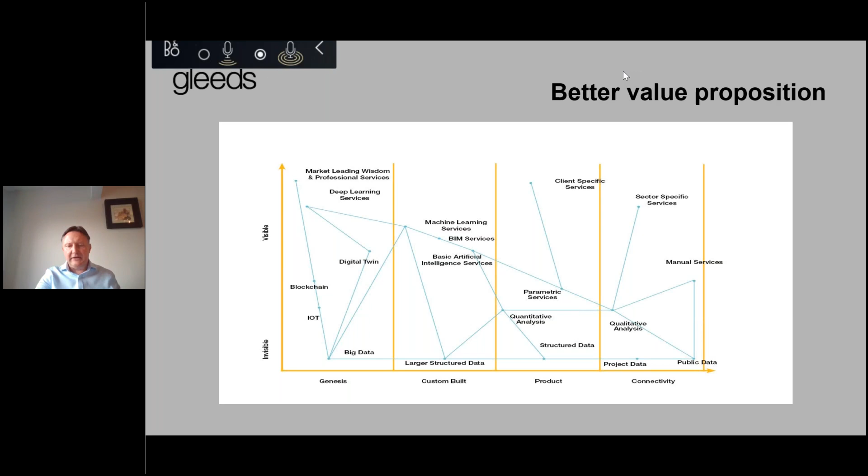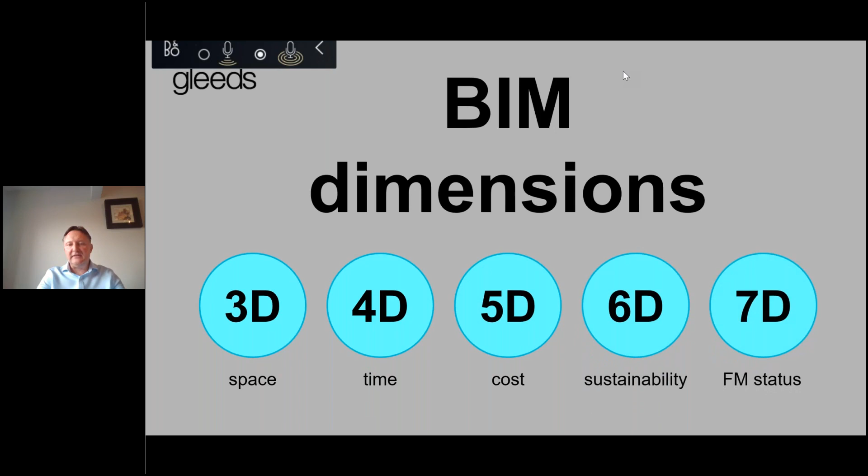But before I do that, I'd like to take you through the simple dimensions that we are using to augment what we do and make us better and more efficient. So the BIM dimensions that we're embedding into the core services are 3D, 4D, 5D, 6D, and 7D. I'll very quickly now take you through what I believe the benefits of each of those are.

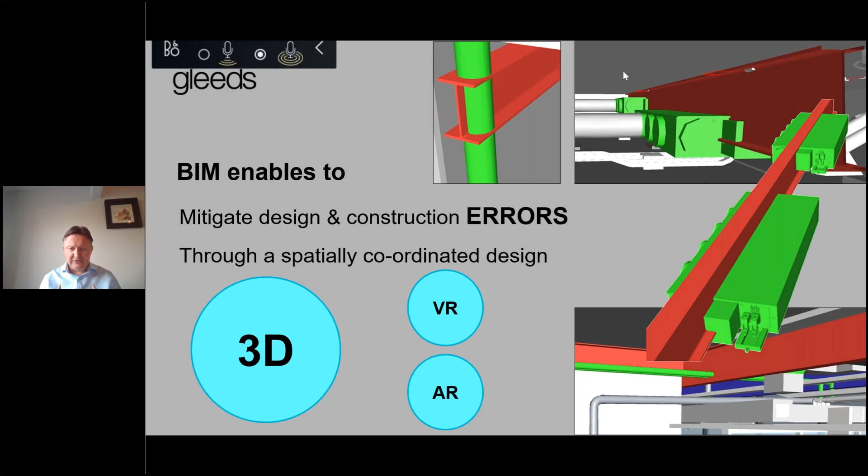So 3D, we all know, helps visualize a project and helps us mitigate design and construction errors through a spatially coordinated design, which I think some of the colleagues are going to talk about. But at Gleeds, what we're doing is increasingly using VR and AR to visualize our products and our services, and that's really helping communications.

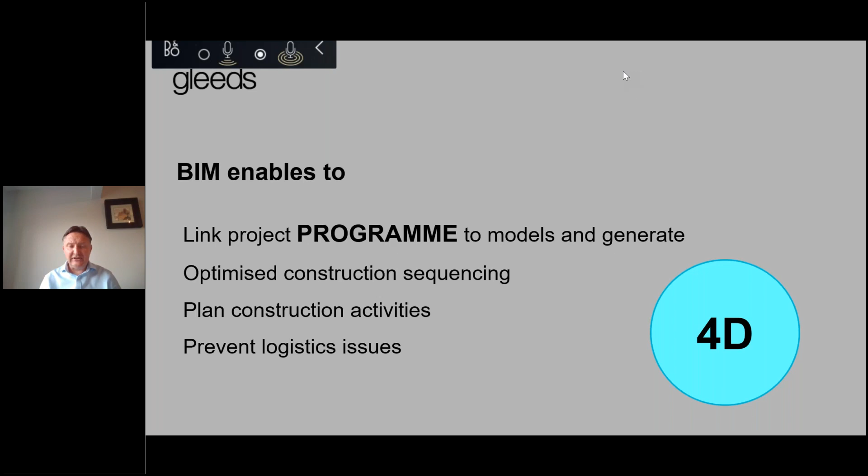In terms of 4D, again, we're linking models to our programs, and that's helping us optimize construction sequencing. It's helping us work with contractors and clients to plan construction activities, and it's helping us prevent logistical issues, which in the current climate is an extremely important tool.

In terms of 5D, we've been using 5D cost plans for a while now, and it's helping us enhance the accuracy of our cost plans. We can automate quantity takeoffs directly from the models. It's allowing us to give clients real-time cost visualization, helping us notify and visualize the changes of cost if there's a design change, and it's helping us with cost reporting and budgeting.

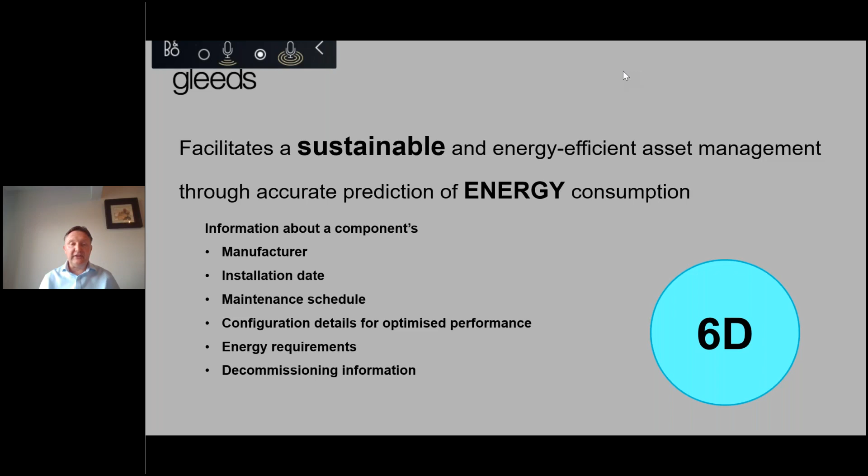In terms of 6D, this is without doubt helping us facilitate sustainable and energy efficient asset management, and it's helping us to more accurately plan energy consumption. I think that's going to improve the more we start to link it with digital twin, et cetera. But it's also enabling us to embed information about manufacturers, installation dates, maintenance schedules. It's helping us to configure how to optimize performance and energy requirements, and depending on what sector we move to, how we decommission that information.

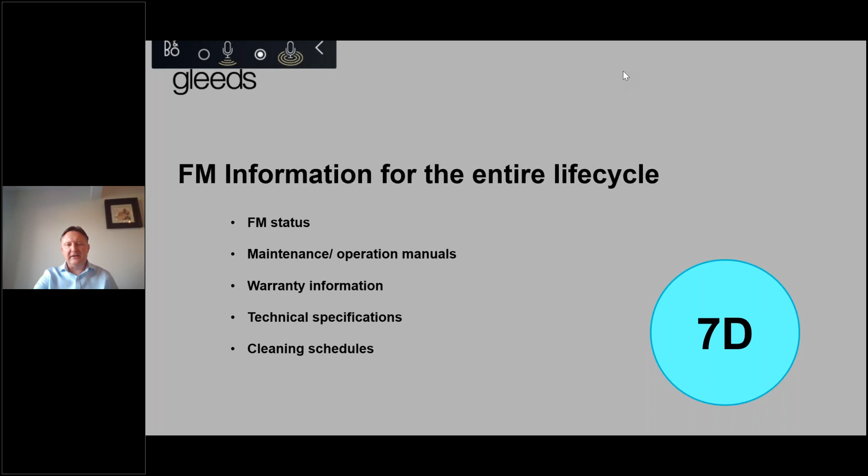In terms of 7D, again, we're using this more and more with our life cycle services and providing FM status, manual maintenance and operation manuals, warranty information, technical specifications, and cleaning schedules. We're increasingly looking at ways that we can link 6 and 7D to the new technologies coming into the industry. So BIM is absolutely essential in our digital transformation. It's a process and technology which helps us digitize and organize our data, which is enabling us to convergently augment project management, asset management, cost management, and building surveying. It will be essential for us with our divergent augmentations of new products and services, which will be linked to digital twins, modern methods of construction, artificial intelligence, the Internet of Things, and blockchain.

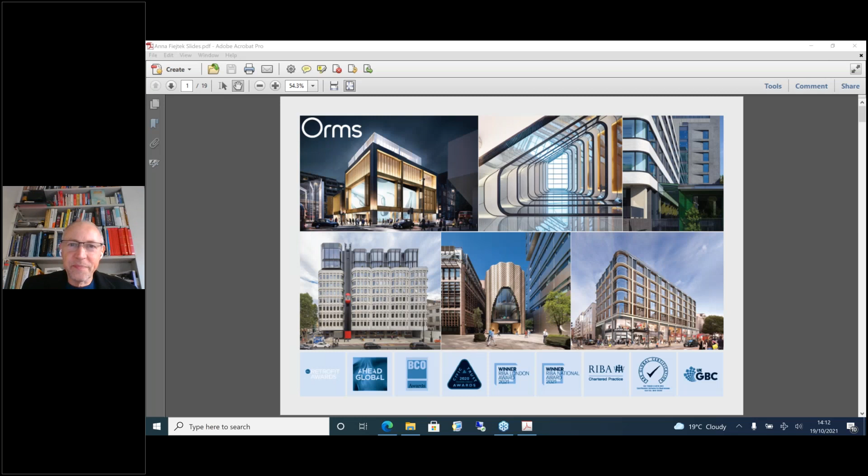Can you see my screen? Okay. Yes, I can. If you could maximize it, I think you've just done that. So that's perfect. Yeah, brilliant.

Thank you. Okay, so I'm Anna. I'm a BIM manager at Orms. I'm also a qualified architect and have been with the office for over 10 years. We are an award-winning architectural practice of 70 people with expertise in new build and refurbishments. We work on offices, hotels, residential, leisure, master planning, and school projects. We started implementing BIM in 2011, and currently all our projects are developed in 3D from the very beginning and embrace BIM workflows. We were awarded ISO 19650 BIM certification by BRE earlier this year, and we are one of the very few architectural offices to hold it, and we are proud to be recognized as BIM experts.

Similar to previous panelists, to us BIM is a clear winner. We don't do any projects in 2D anymore. This is because we see many benefits to BIM and think it's a better and smarter way of running projects and delivering better value for our clients. There are multiple studies suggesting that BIM is delivering cost and time savings, as well as improving quality of design when we look at the whole process, including construction and handover.

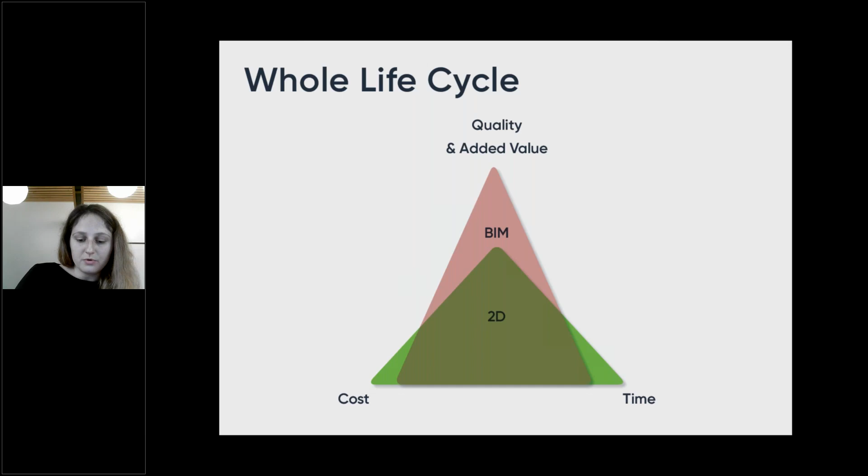However, at present, this doesn't seem to be the case when we look at the design stages of the project, which is what we work on, what we are involved in. So for architectural practice, in general, we spend more time on design and coordination. We need more people allocated to projects from early on, and the cost of running projects is higher for our practice. However, we see improved quality, improved communication, and risk management.

Our projects are larger and more complex, and we produce more information in general. We can also analyze our designs to a greater degree, and we can provide more added value to the clients, contractors, and FM teams, which would not be possible without BIM.

So in terms of time, when we moved from 2D to 3D and then BIM, this affected us in many ways. We can see a few things that we can do much faster and better than in 2D. For example, our plans, sections, elevations don't need to be manually updated and checked. Our renderings always match our drawings as we use our BIM models to do that.

We also have the ability to create VR, virtual walkthroughs, and animations that are now straightforward and quick to create. Also, thanks to digital collaboration tools, we can raise design issues easily and track them in a cloud. This is, of course, much better and much faster than what we used to do in Excel. We also see fewer RFIs and problems on site if we use clash detection from early on.

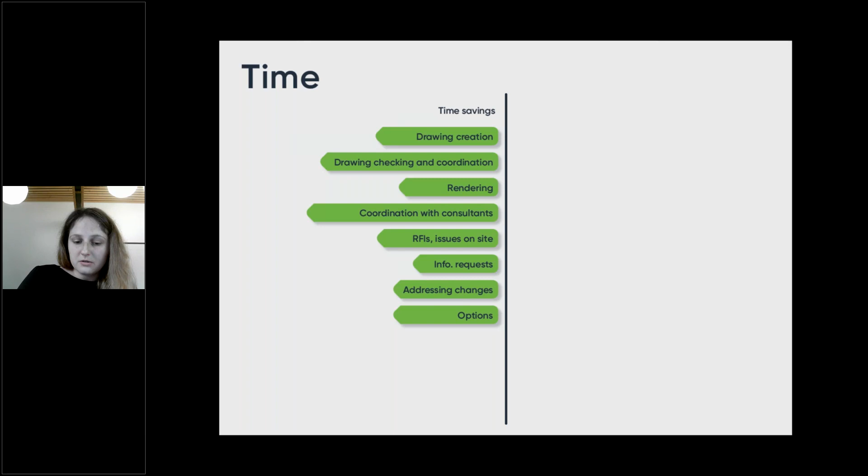However, to get those benefits, we need to spend more time elsewhere. For example, we coordinate better by using clash detection. That saves time on site, but it takes time to model the building to a greater degree and to fix all the clashes that we wouldn't even know we had if we were working in 2D.

And while CGIs are easier and faster to create, we make more of them and we spend more time on design and analysis to make the design better. And when it comes to design changes, it can go either way. Some changes are easier done in the BIM model, with all drawings updating semi-automatically, while other changes are much faster in 2D, where you don't have to deal with all the complexities of a 3D model.

And then on BIM projects, where clients ask for data to be included within the models, we need to create proper BIM documentation, including BIM execution plans, to ensure that we can deliver what's required. So input of asset data is a relatively new requirement, and it's another time-consuming task that we carry out for the benefit of our clients.

Another thing is information sign-offs that we try to implement as per ISO workflows when we use a common data environment. So all of this takes time, and on many projects this requires additional resource of a document controller. So as you can see, for an architectural office, more time is required to deliver BIM projects in comparison to non-BIM projects.

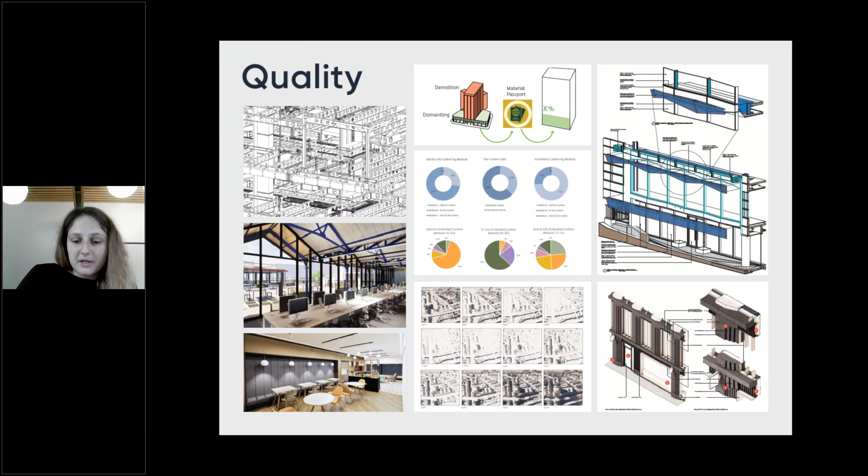And it's much easier to explain our designs using models. Common data environment, clash detection, renderings, tools for managing design online to keep track of ongoing issues - all of those help with reducing risk of changes and delay on site and improve quality of the building. So BIM definitely improves our communication and improves quality, but overall it can be a complex process requiring a lot of training and management.

When it comes to cost, it costs architects more because we need to spend more time delivering data and managing large amounts of information that we didn't need to do in 2D. BIM software is much more expensive than 2D software. We are now at the point where a 1 year subscription for one user costs the same as a perpetual license used to for a 2D package. And when we did move from 2D to 3D, the cost doubled.

Also, staff training takes longer, and for our size practice, we need support of BIM staff and a document controller, and on some projects we also require a BIM coordinator who ensures compliance with EIRs. And there's additional software that we didn't need before, starting from multiple BIM model software add-ons that enable us to work faster, clash detection software, and CDE platforms that are subscription-based.

So BIM costs more at the design stage. However, there are a number of studies that suggest that this cost is paid back many times over when looking at the overall project costs, including construction and handover stages.

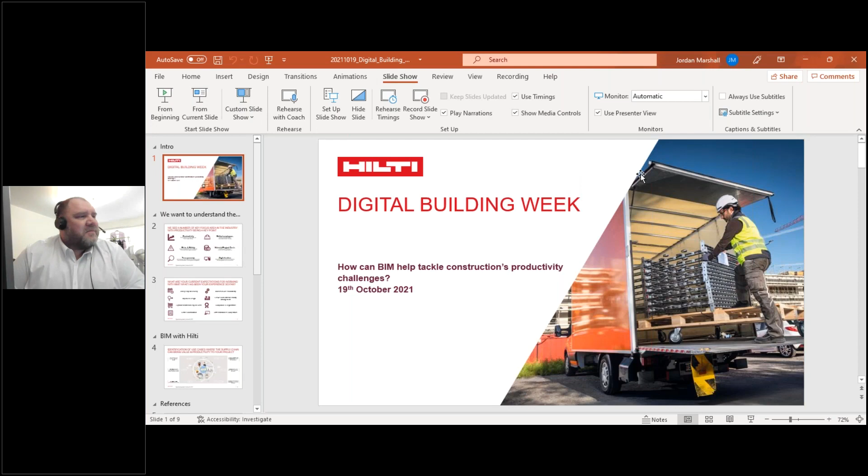Nice, could I have my slides please? Perfect. So yeah, I'm Jordan Marshall, I'm Technical Marketing Manager for BIM and MEP for Northern Europe for Hilti. Hilti themselves are a construction product manufacturer, working in 120 different countries and employing over 25,000 people globally. Next slide, please.

If we look at why we all started getting on our BIM journey, there was a number of reasons why we wanted to ultimately make our projects better, whether that's through material control, whether that's through ensuring standards and regulations are maintained, whether that's through productivity, the ability to pull out as-built information a lot faster. There's a number of reasons why we all got involved with it, with productivity I feel being a key driver. Next slide, please.

I think that one of the elements with productivity where we can start to grow and drive that forwards is to start to engage more with our supply chain at an earlier stage through design, rather than when we actually get to the construction site itself. We then can start reaping some of the benefits around key topics such as productivity, material control, standard and regulation adherence. Planning becomes a lot easier, we can start scheduling in materials, things like that. Next slide, please.

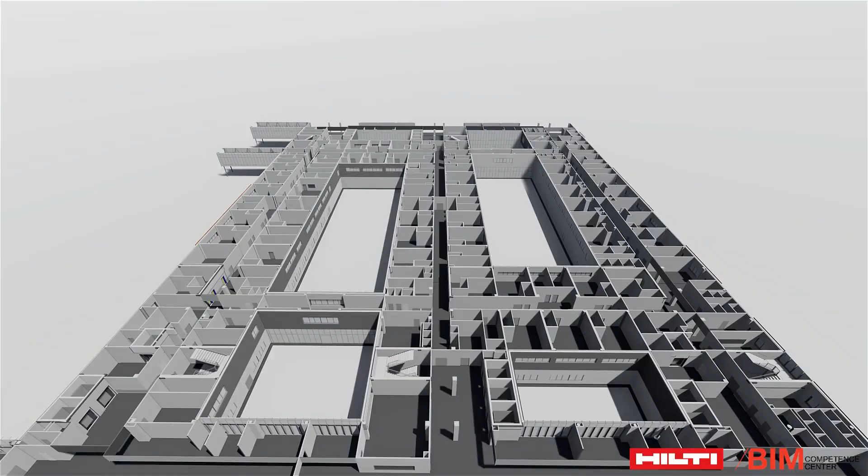When we come to some construction sites and talk about MEP supports, sometimes, particularly on some of the older sites, it can look a little bit like a forest of steel when we walk down some service corridors.

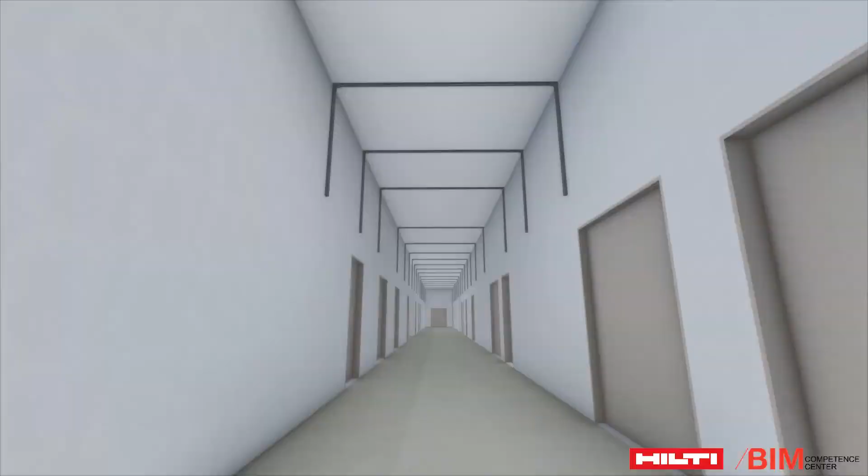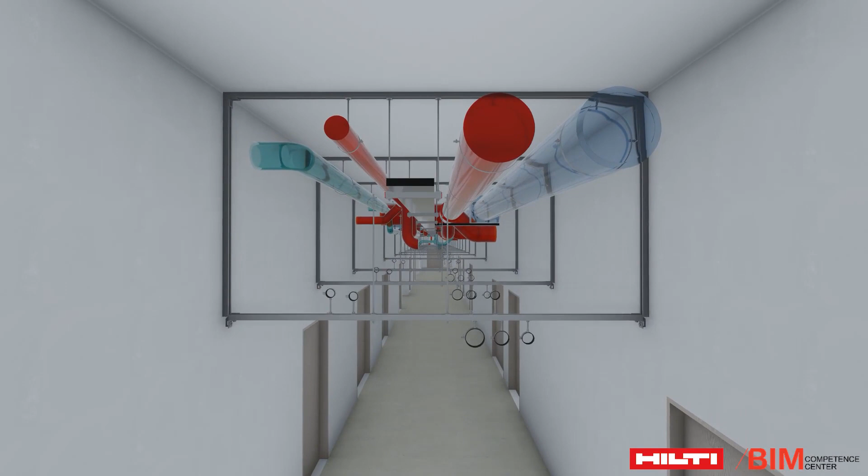But if we can start to optimize that design and move to a multi-trade service support approach, we can take out a lot of the steel work in these service areas. We can get all of the trades onto common supports, reducing material and the number of fastening points back to the structure, and it's a lot quicker to put up one bracket than seven. I think we can all agree on that.

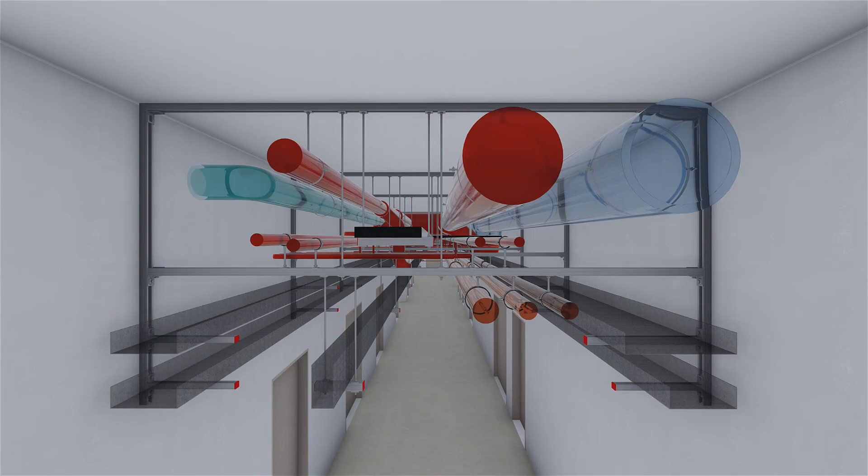This drives great benefits, but moving to this multi-trade approach also allows us to take advantage of prefabrication services in the market, whether it's as simple as getting channel and strut cut and delivered to site at the right length so we remove hot works, or going down the kitting route or fully assembled bracketry delivered to site when we need it for each zone. It all becomes a lot easier when we move to this alternative way of thinking.

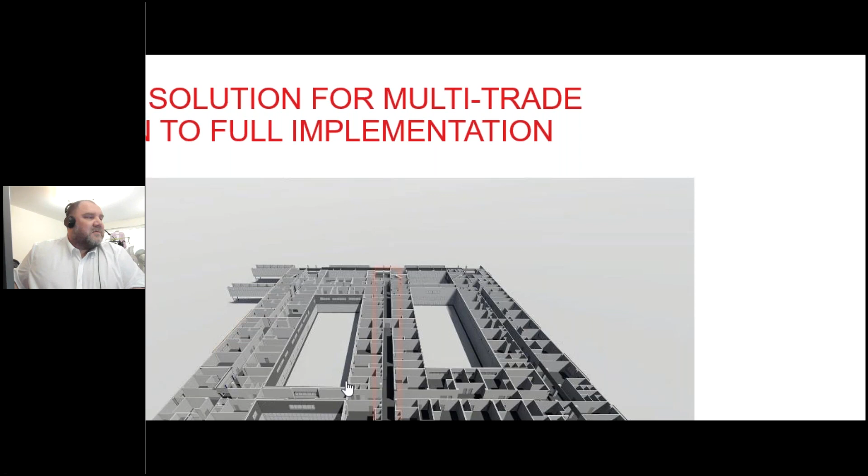That then also links into fire protection, or passive fire protection and fire stopping. Could you start the video, please?

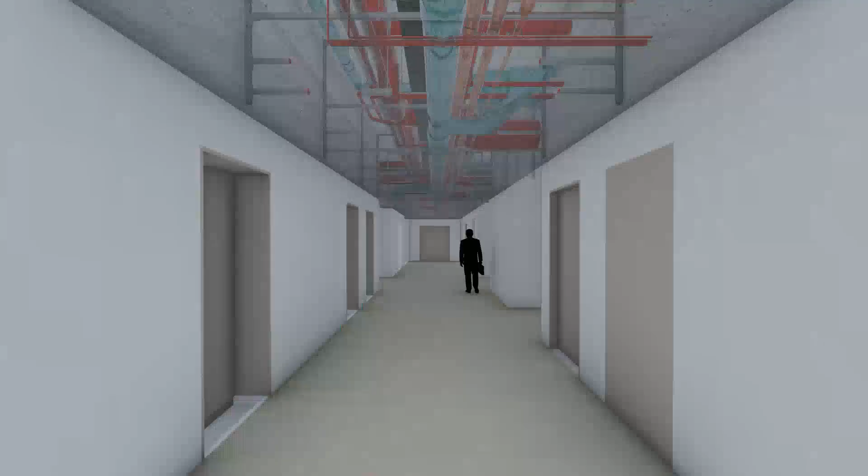When we move to looking at passive fire protection, there are added benefits where we've had the mechanical and electrical containment all coordinated together on that common bracketry.

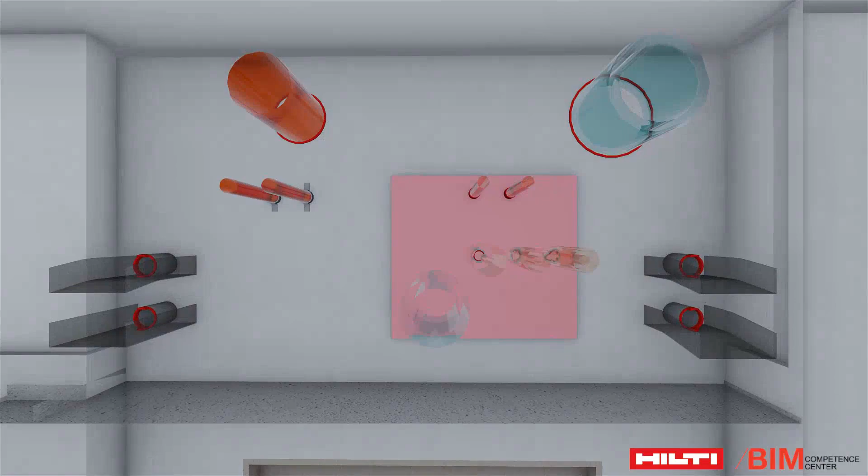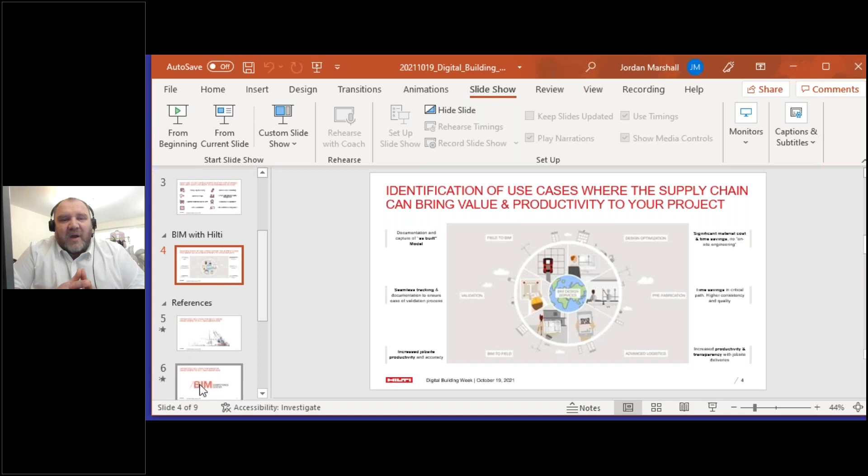We can then ensure that the bracketry near the fire seals is fire rated if that's a requirement. We can also start planning how these services pass from one area to another and design the fire seals accordingly—whether through standard tested approved solutions or managing engineering judgments. This all becomes a lot easier when everything is coordinated, and again it can all be driven from our BIM models and engaging with the supply chain much earlier.

And then when it comes to that BIM-to-field element and the introduction of newer technologies, we've all seen total stations on a lot of construction sites now. But taking that total station a step further and introducing an element of robotics as well on the construction site not only drives productivity, but also allows us to minimize some of those health and safety risks.

Thinking about some projects in particular, if you're introducing elements like robotic drilling, one robot can go from drilling to 5, 6, 7, 800 holes in a day, with no operatives subjected to the risks of working at height or the inherent risks of dust when drilling, because everything can be done dustless with vacuums fitted to the robotics.

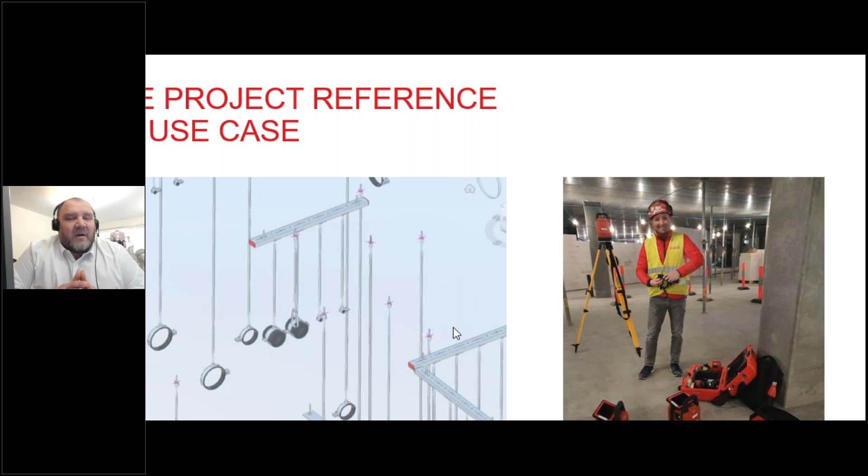And having the robotics linked via the total stations built into them, back to our BIM models, ensures we maintain accuracy as well, so everything is as it should be. Just finally for me to say, thank you for listening.

Great, well thanks very much, Jordan. It's very interesting, particularly the bit on robotics. So am I right in thinking that these robotic drills know exactly where to drill? They've got the BIM model somehow loaded into them, and they know exactly where to drill a hole. Is that right?

Absolutely. Much in the same way as you'd extract the field points from a BIM model for a total station, you then feed that into the total station built into the robotics, and it's also programmed with its start and finish locations. Once you've programmed that in, it knows where it is and goes off to carry out its drilling tasks. So the key is, when you set it off, getting that exact position right.

You put it in the start position, and then it's all relative to that, presumably. Absolutely. You essentially model in its multiple start and finish locations, taking all of that from the BIM model, and you've taken that whole drilling operation down to just one person operating the robotic drilling machines.